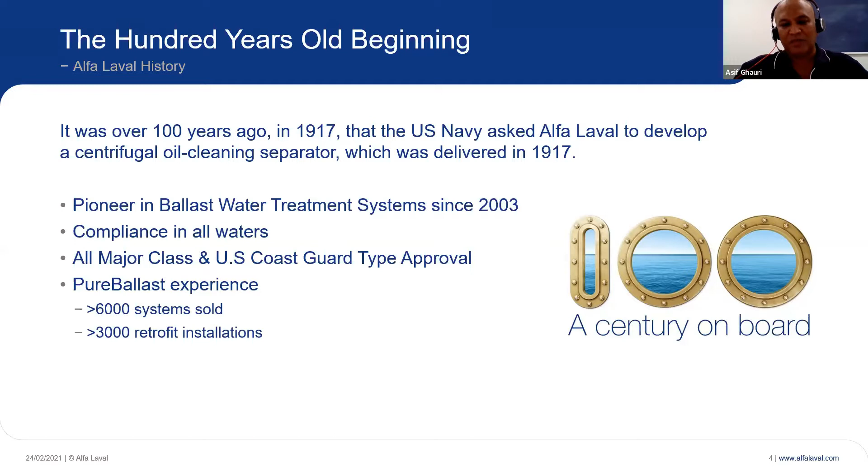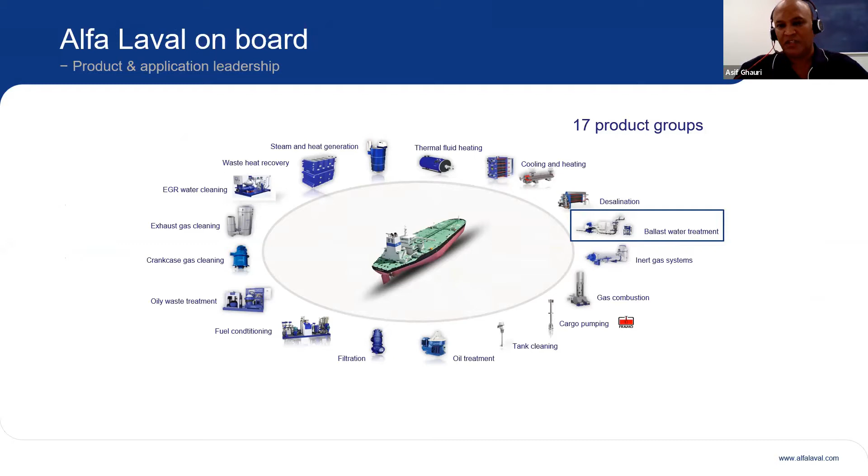The ballast water treatment legislation - as we all know, ballast operations are vital on board ships depending on loading, unloading, and different reasons for it. The UN recognizes the spread of aquatic invasive species as one of the four greatest threats to the world's oceans. That's why the Convention for Ballast Water came into force on 8th of September 2017.

Ship owners and operators are required to have a compliant and approved ballast water treatment system for their ongoing operation. 86 states have signed the treaty, representing 91% of the world GT percentage.

There are two different approving authorities: IMO, which covers the global market, and the USA, which has its own legislation where the requirements are a bit more strict. Because most of our fleet in Australia and nearby operates under the IMO umbrella, we will be talking more about the IMO Ballast Water Convention today.

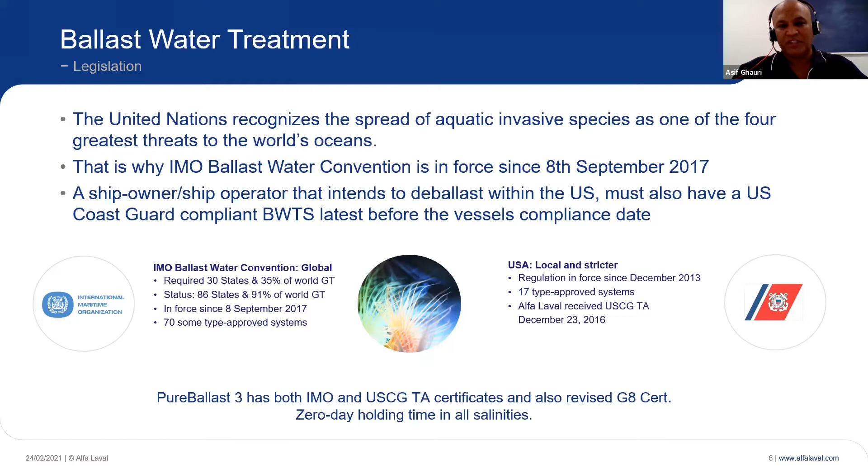As per the IMO rules, it has now been ratified by 91% of the world GT, gross tonnage, and by 86 states globally.

As per the rules now, new vessels must be equipped with ballast water systems at delivery, and existing vessels should install one system between 2019 and 2024. It's getting tied up, unless they have an exemption, with their docking dates as it happens.

The revised G8 is a testing mechanism used by IMO and US Coast Guards to approve different systems, and Alfa Laval was one of the first to get approval under the revised G8 regulations.

Of course, as we talk through this presentation, there are other requirements that customers and ship operators need to comply with as well. On the right side, I've included some information on the US Coast Guard regulations, but we will emphasize more on the IMO operations in this presentation.

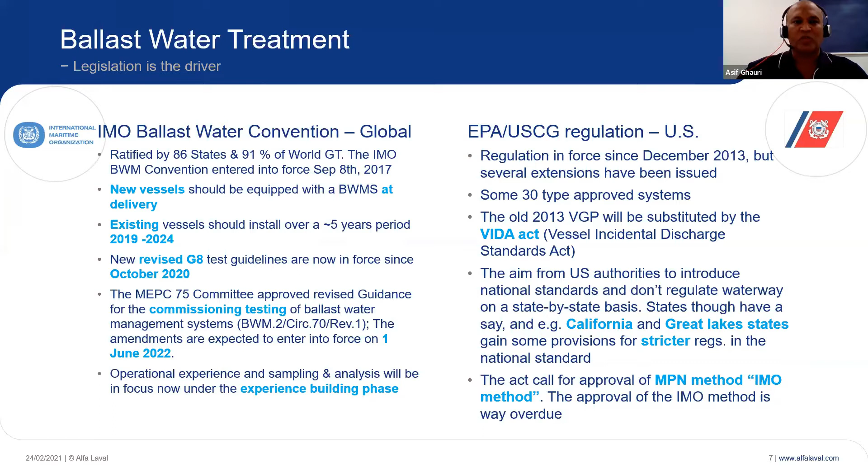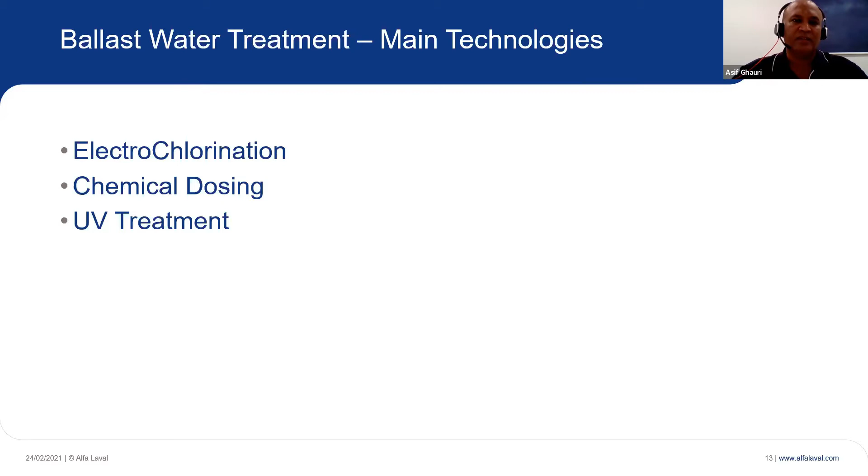Of course, there are different factors affecting the water characteristics that impact the ballast water treatment operation. The three main ones to consider are UV transmission, salinity, and temperature.

The main parameter of the UV system is the UV transmission. It's important to know the UVT values of the water being treated. UV transmitting levels in harbor usually range from 90 to 60%, but can sometimes fall to 50% or below. When UVT is low, more power is needed - high UVT equals clear water, low UVT equals poor water quality.

I will go through a bit more detail of how our system works and what is involved in that.

Salinity is a factor for chemical systems. Companies supplying chemical systems use high salinity water. Most ports could be exposed to river runoffs, meaning average salinity levels are generally lower. In order for these systems to run effectively in brackish or fresh water, they require the addition of salt or high salinity water, which must be stored on board in order to be effective.

Thankfully, our solution's systems are not dependent on water salinity.

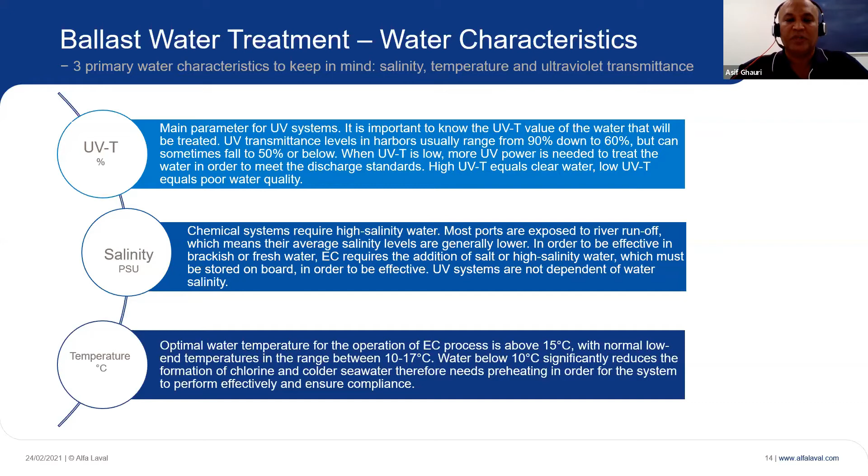Just a brief intro on the three systems that we talked about. Electrochlorination is the first one. The electrolysis of the seawater forms chlorine and hydrogen gas. The charge is introduced in the system, and the chlorine gas dissolved in the water produces sodium hypochlorite, which is used as a disinfectant.

There are some limitations to this system, such as that in fresh water, the power consumption is significantly increased. Also for these EC systems, as they're normally referred to, they will additionally require hydrogen traps, flame arresters, and other methods to safely handle the hydrogen which is formed in the process.

This allows for a one-way treatment, meaning during the ballasting operation, the seawater goes through the whole treatment, whereas when deballasting, it doesn't go through the treatment system. However, some kind of neutralization is required, which is an additional system you have to keep on board. In the case of the Alfa Laval UV system, the water gets treated during both ballasting and deballasting operations. Also, with EC systems, electrode cleaning is required, which is again an extra labor step for this system to work.

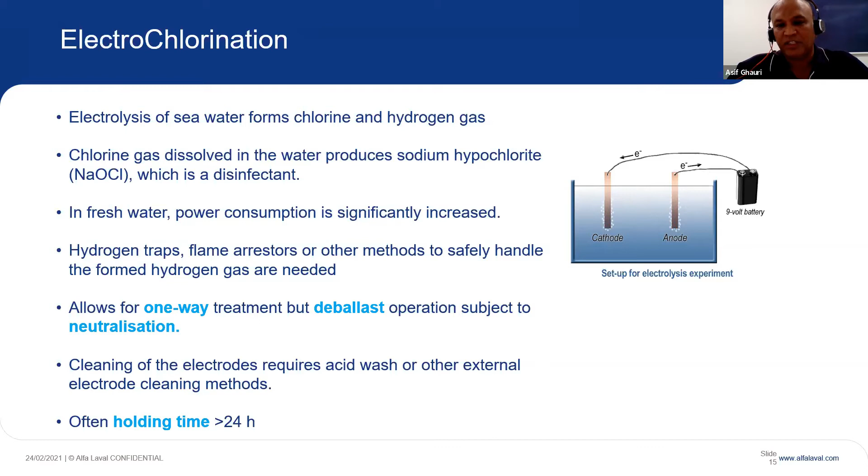The holding time is another critical thing to consider when selecting a ballast water treatment system. Different systems have different limitations. As far as the Alfa Laval system is concerned, we have zero-day hold time. We have only got 2.5 hours holding time before the water can be discharged, and that is only for the US system and systems operating in US waters. In Australia, we don't have any hold time requirements.

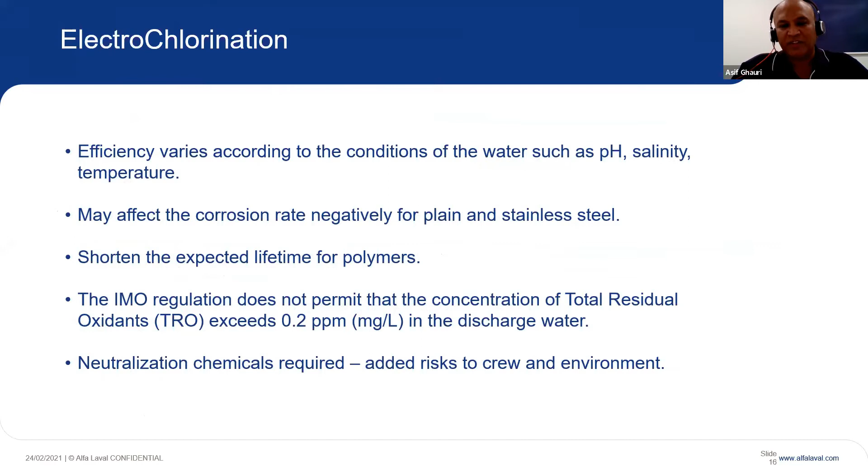The efficiency varies according to the condition of water, such as pH, salinity, and temperature, which may affect the corrosion rate negatively for plain and stainless steel. This shortens the expected lifetime of the polymers and chemicals you're using, and as stated earlier, neutralization chemicals are required, which is an added risk to crew and environment because of the chemical handling required on board.

Chemical dosing is another treatment system technology used for ballast water systems. The chemicals are made in a tank which is mixed with the ballast flow. The most common chemical used is chlorine dosing. Approximately 1 to 10 ppm of chlorine is dosed in with the ballast flow. The chlorine level is neutralized prior to discharge, and neutralization chemicals and monitoring are required, which is again another step that adds complexity to the system.

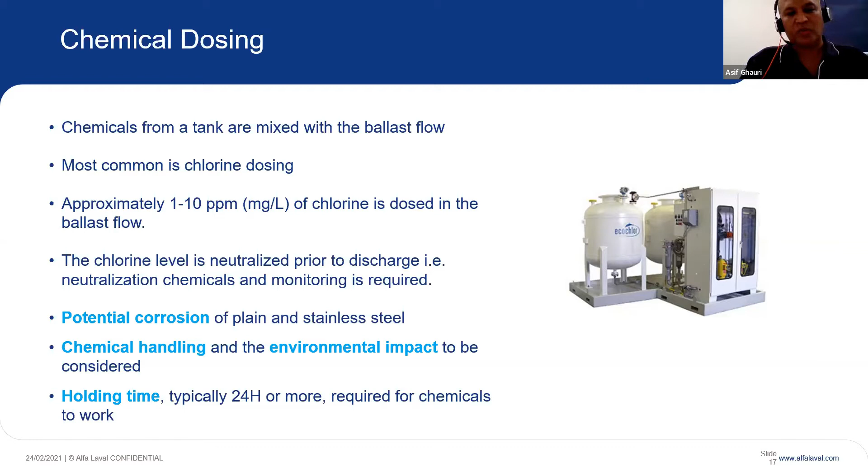Corrosion, of course, depends on the chemicals you're using, and if you're trading internationally, the quality of chemicals received at different ports can be different, so the risk of corrosion is very real in this case. Chemical handling and environmental impact must be considered as well. Again, a holding time of 24 hours or more is required for the chemicals to work.

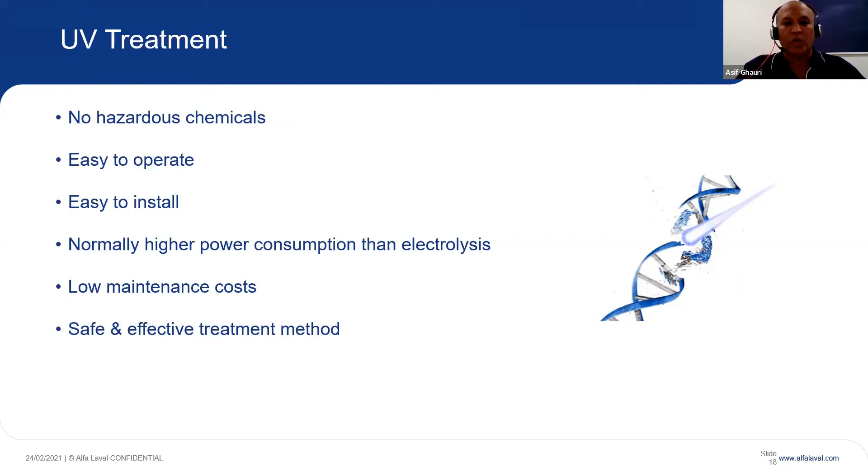The next one we are going to talk about is UV treatment. Of course we are not the only one providing this solution, but I will give reasons later on to say why we are the best in the business. The good thing about UV treatment systems is there are no hazardous chemicals required. They're easy to operate and install. The negative point can be a slightly higher power consumption than EC systems. However, our maintenance costs are low, and they are a safe and effective treatment method.

The Alfa Laval PureBallast systems are equipped with medium pressure UV lamps. There are medium and low pressure UV lamps, but in our solution we use medium pressure UV lamps with a very high output, typically 50 times higher output than low pressure lamps, making them very effective. As stated earlier, we have type approval from all the major class societies and also the US Coast Guard, and we are Revised G8 compliant systems.

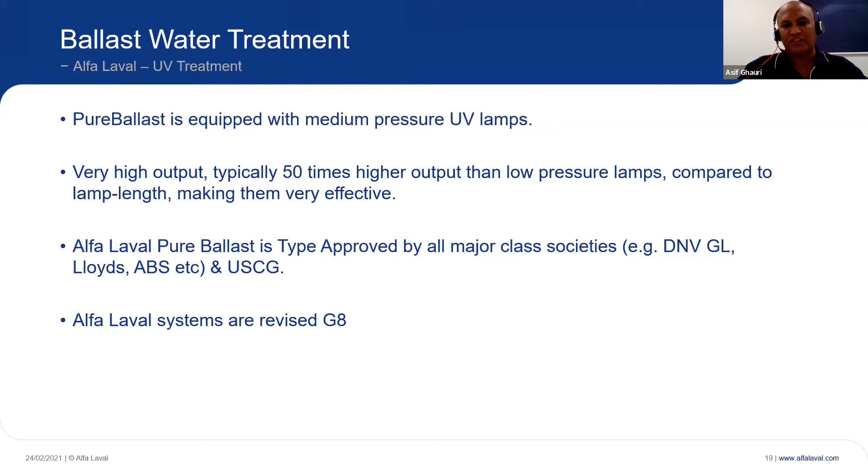They have the first generation Alfa Laval ballast water treatment systems installed, and hopefully these will be upgraded to the latest version within the next 12 to 14 months. That was very interesting, and from there, with our continuous research and development, we have achieved different milestones, including zero-day hold time, Revised G8 compliance, and approvals for operating in different environments and water conditions.

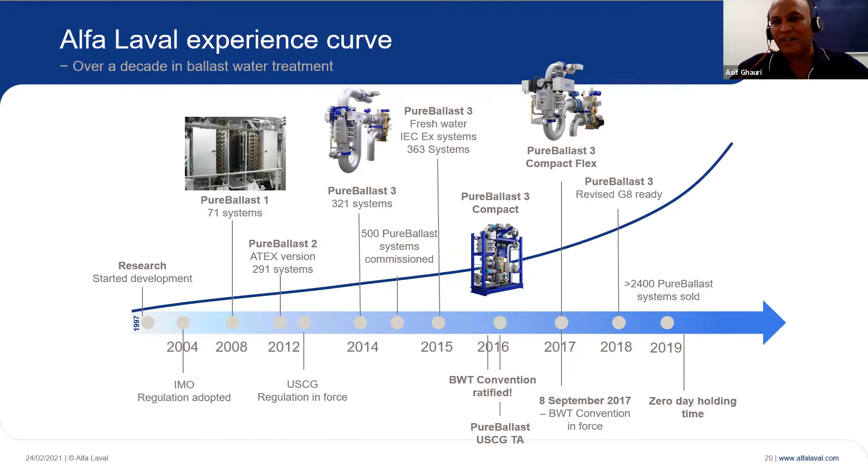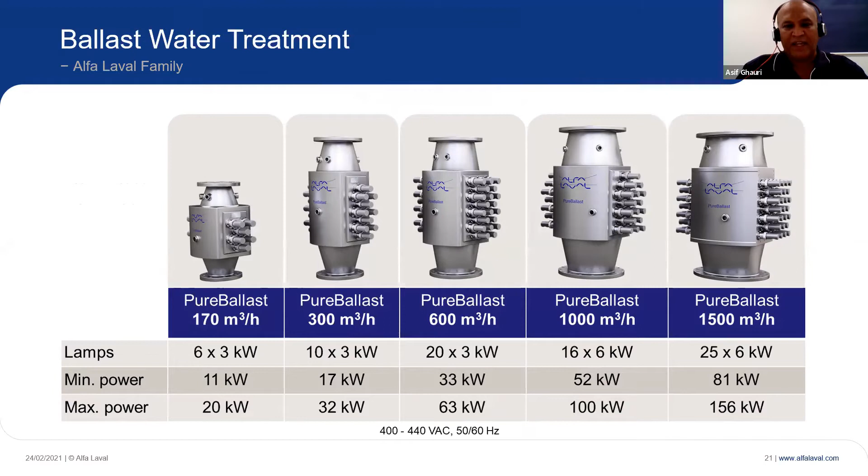Through our research and R&D over time, we have improved our design by introducing corrosion resistant SMO 254 for our reactors, which is a high alloy austenitic stainless steel. This is specifically developed for seawater applications, and it has a higher corrosion resistance than 316 stainless steel.

The Alfa Laval pure ballast systems are available in standard, compact flex, explosion proof, and deck house configuration. There are more slides to come, where I will briefly talk about what different systems look like. Okay, the next one. So these are the four.

Another recent addition to the family is a deck containerized solution for customer specific needs, because of space in the engine room and a few other factors, but that's not shown here.

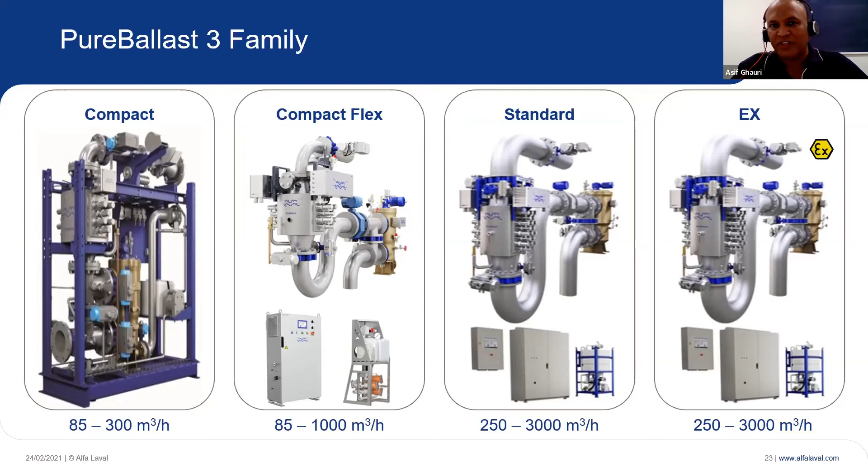Just going through the component, as you can see, this is our standard system. This is a very simple inline construction where the water enters the filter before it is treated in the UV reactor, and it goes to the nominated tank.

Most of the operation is automated. After every operation, our cleaning in place unit kicks in to clean the UV lamps, to ensure extended life and extended operational availability. And the filter, of course, is equipped with backflush.

Once it gets to a point after a certain operation, or depending on the DP, it will automatically backflush the system just to get rid of all the accumulated debris in the filter. So the whole system is automated, with minimal and simple operation and minimum human interruption.

Through our initial systems that were sold in different markets, one of the biggest challenges that we came across was how to install, as you can see, the normal system. Because customers have different requirements, especially if you're retrofitting in a small engine room, space is a huge challenge for us when installing our system.

One of the really big improvements that Alfa Laval came up with was two systems: compact and compact flex. The one on your screen showing on a skid is an Alfa Laval compact system, where the whole system is on a skid. It is basically a plug and play system, and it is very easy to install and connect to the existing setup.

Of course, there will be some piping required to be done after the system to the existing ballast water system on board. But as you can see, the actual installation of the ballast water treatment system is rather very simple and easy. This system is available from 85 to 1,000 cubic meter capacity.

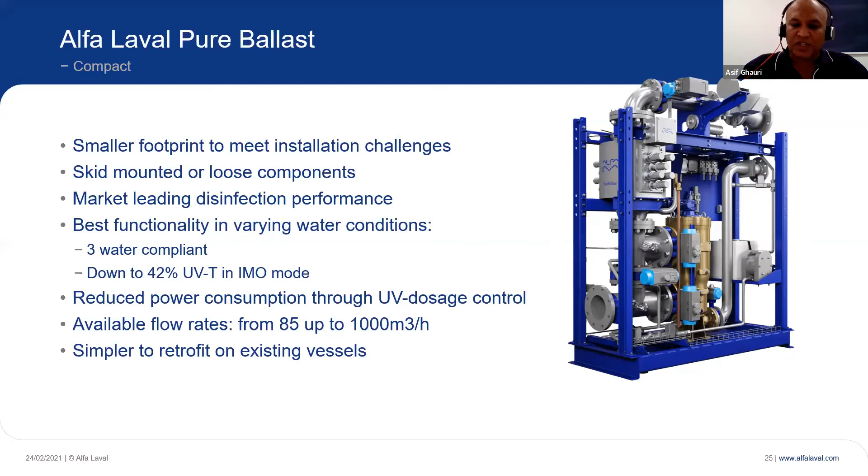I must say, this is a very good product for us to sell. It's very, very easy to convince the customer, and they can see the benefit of this, because the installation costs for these systems are a lot cheaper than the other systems, which I'm going to show you on the next slide. As you can see, the same system is supplied in different components.

We call it a compact flex solution. This system originally came from our purifier modules, where, of course, when space is an issue, we supply the components, the system in component form, and the customer can then install them at different locations within the allowable proximity and get the units connected.

However, in the compact flex solution, as you can see, because of the installation requirements, the installation costs are higher than the compact. So of course, for us the better option, the preferred option, and for the customer as well to give them savings, we try to sell the compact systems. But where that's not a viable solution, the compact flex is another alternative and a very effective one.

The ballast water treatment system, depending on ship size and operational requirements - power is one big thing to consider. As per our R&D and what we have seen in most normal operations, our power requirement is only 50% of the rated capacity for our system. Since the system is automated, as water quality deteriorates, it adjusts UV transmittance automatically, meaning required power consumption can go up as well. But for most systems under normal operational conditions, the required power is only 50% of the rated capacity.

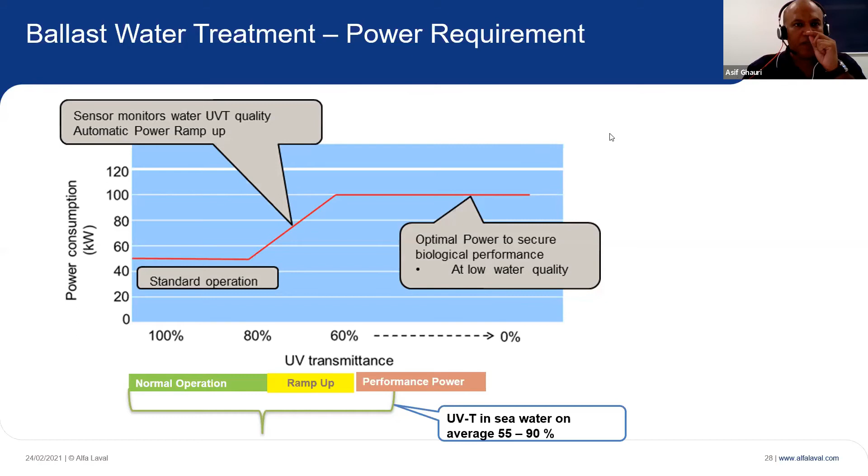Now just a few quick slides on the process, the actual process of the retrofit. In Australia, most of our customers are coming to us for existing ships. It's a small market, so most of our projects have so far been retrofit projects.

In Alfa Laval, we have a global pool of engineering partners - companies who we train on how these systems are to be installed and what to look for. They become our engineering partners, who we can refer our customers to for 3D scanning, installation assessment, and engineering reviews.

In addition to that, we provide ongoing assistance through our excellence centers in China and Europe, where our colleagues are on a daily basis involved only in answering different questions from our customers regarding installation, design requirements, or any other question they may have from time to time for their selected system.

We also, from Australia, when we sell the system, provide installation checks. Before commissioning, we do pre-installation checks - I've done a few myself, where we visit the ship to check for available space, then talk to the customer about their requirements. Once the system is installed, after they've consulted with the engineering company who's done the review and the 3D drawing, we know where the system will be installed, and then we do an installation check before commissioning as well.

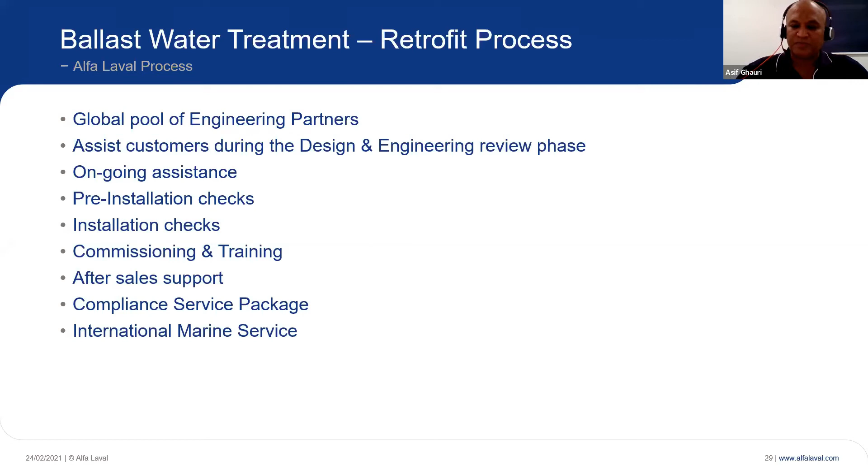Just the retrofit experience, we have sold 6,000 systems worldwide so far. More than 3,000 have been retrofit projects. As you can imagine, the ship size and customer needs and requirements are very different, and every sale we make is a new project with its own challenges.

And that is one of the biggest differentiators for Alfa Laval: our local presence and understanding of the local market and customer needs. The other suppliers in our market either operate through their Singapore or overseas offices, or through a local engineering company. Whereas in our case, when you're dealing with us, you're talking to Alfa Laval, getting services from Alfa Laval, not from a third party who may or may not be trained. We are constantly developing and working on our systems.

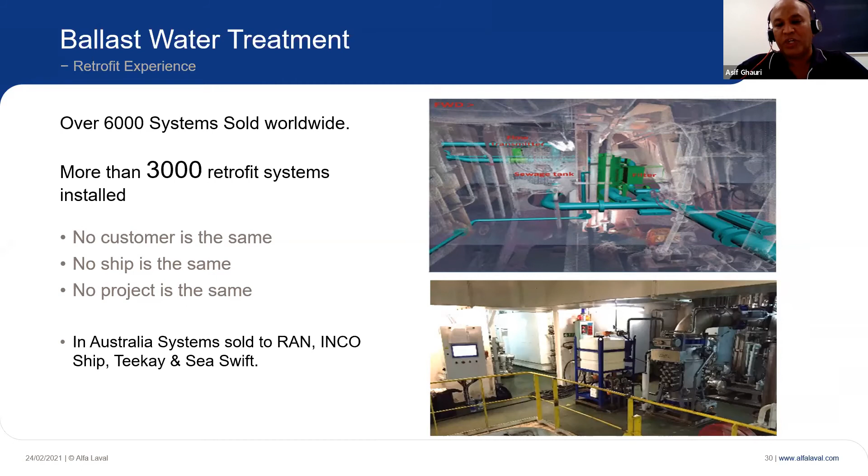Over the systems that we have sold, as I mentioned before, no two systems are the same. What we have learned over the last 18 months or so is that it is very important that the customer is willing to invest the time right in the beginning of the project, to ensure you have the available space, and have discussions with the Alfa Laval approved engineering partner to do the required surveys of the system and 3D scanning of the area, just to ensure the right system is selected and everything needed for the system to work is available.

The later it is done, I mean these are things we'll need to do at some point anyway, but the later it is done, it will simply add to cost and delays of the project. So that is why this is one thing we have learned.

The work is really important, and installation supervision is crucial for successful installation, commissioning and training. As I stated, it is always good that you're talking to the OEM rather than the sales company or sales agent of a supplier who is not present in Australia. Especially in these COVID times, the need to have local resources and the ability to respond to customer needs was never more important than what we have seen during this pandemic.

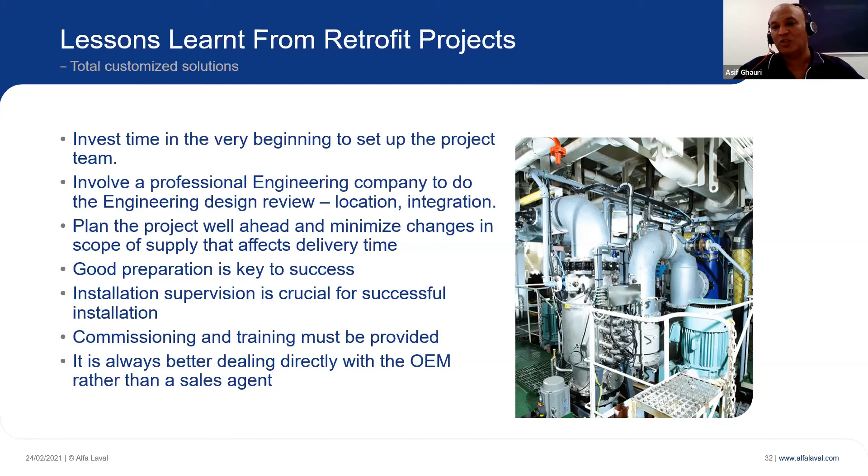Again, during this COVID-19 pandemic, remote assistance and remote working with different customers have become really important tools. I'm sure you would have seen the same tools implemented or promoted by different companies as well. So this is something we are offering with our systems too.

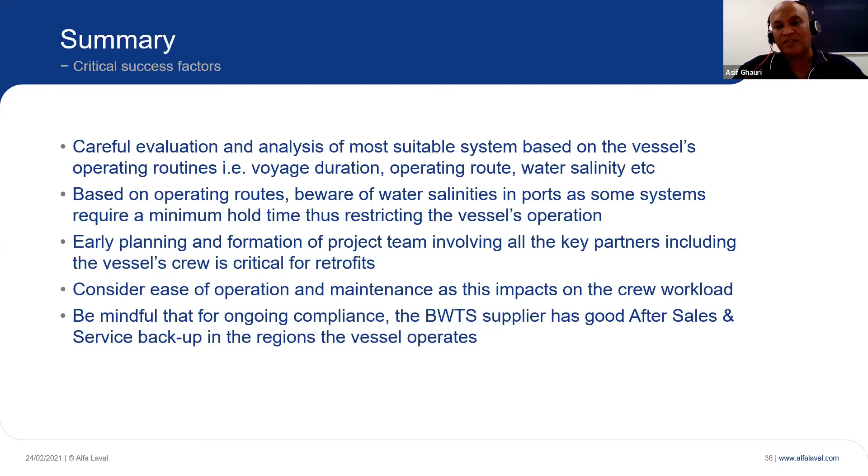Early planning and formation of a project team involving all key partners, including the vessel's crew, is critical for retrofits. Consider ease of operation and maintenance as this impacts crew workload, and be mindful that for ongoing compliance, the ballast water treatment supplier's system has good after-sales and service backup in the region the vessel is operating in.

And with that, I am open to any questions you may have, please.

Phil Helmore here, Asif, if you can hear me. The question that I have is, whereabouts is the UV treatment applied? Is it applied in a tank, or is it applied to the incoming ballast water as it flows in? It is applied through the incoming ballast water as it flows in.

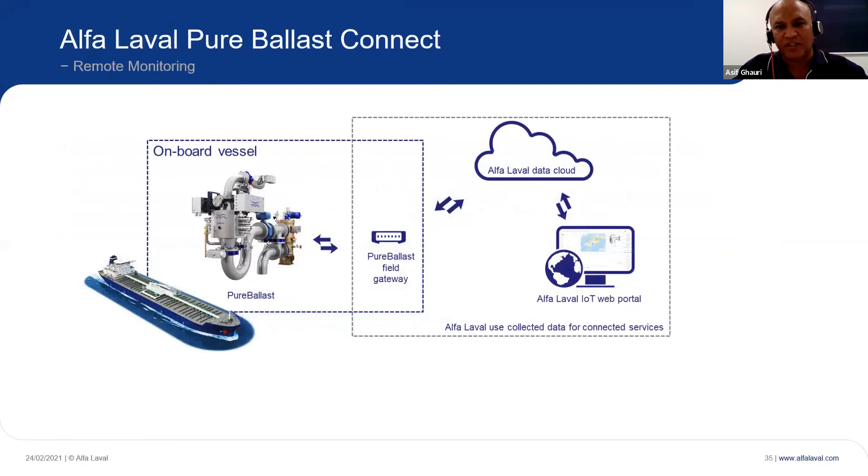Right, okay, that's the question, thank you. Yes, and the same applies when we are deballasting - the only difference is the filter is bypassed in the deballast operation. Does it go through the lamps again on the way out? Yes.

In our solution, the water gets treated going into the tanks and coming out, just to ensure compliance, and to reduce last risk in the operation.

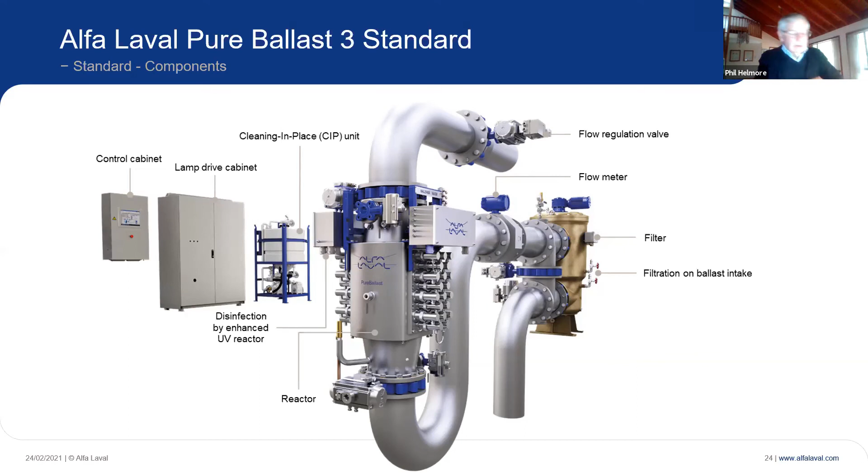Thanks. Geoffrey here, I have a question concerning the materials used. You said it's a high alloy austenitic steel that gives better corrosion resistance than 316L. Do you know what the designation is, is it 321? For the reactor, we are using SMO 254, which is highly corrosion resistant. In some of our earlier models this was not used, but over time through our R&D, we are now using SMO 254 for our solution.

Steve Morant here. Hi, can you hear me? You indicated annual compliance certification is required. Is that an internal requirement, an IMO required classification, through class societies, flag state, or just an internal Alfa Laval requirement? No, it's an IMO requirement for the system to be in compliance, and the annual service compliance has to be done by the OEM.

And for your case, we will be providing the service through Alfa Laval Australia. Do you do that in front of class or flag state, or do you just send us certification? No, we will do the service and issue you the certificate, which is kept on board, and if you are asked by class, you can show that certificate that the system is in compliance.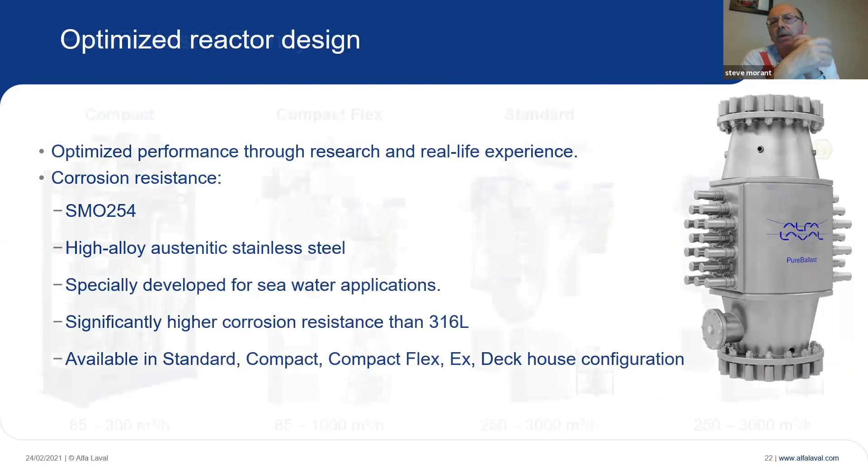I'll have one other question, since nobody else has jumped in. You've indicated that the skids can be split down, and I know from experience that skids will be split down and installed in various areas. Is there a maximum distance between pump, filter, UV unit, and reactor, or can they be really remote from each other?

I think the limitations are given in the design guide, installation and design guide for various systems, and we ask our customers and engineering partners to refer to the design guide supplied with each system. But this is mostly for when space at one location is critical or not available, and that's why this solution works. Of course, at the time of system or ship evaluation, the distances will be considered as well.

I'm assuming your remote monitoring offer can be retrofitted to any installed equipment already there. What sort of additional cost would you be looking at, and is there an annual cost to maintain remote monitoring?

There are some costs available for monitoring, very nominal, not too expensive. I'll have to check the systems. I think they are only a few hundred euros per month per system, if my memory serves me right. But for your actual system, which is going to be installed on Jules, I can get more information and submit cost proposals to you. Okay, thank you. No problem.

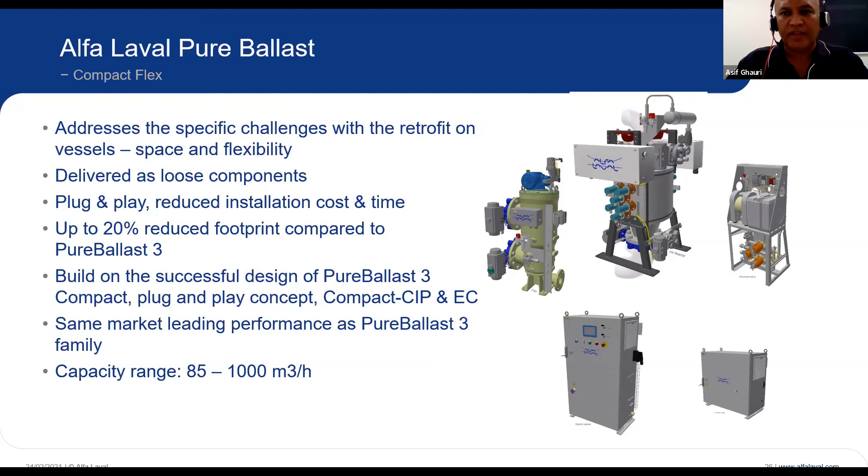Jeffrey here again. Can I ask you about the lifespan, or expected life, of a UV lamp? I think it's 3,000 operational running hours. The running hours for the UV lamps.

I'm thinking you wouldn't be replacing just one lamp. I wondered if there was a system in place for replacing them all at a set time span. The running hours for UV lamps is 3,000 hours, and we have the CIP system to clean the UV lamps after each operation as well. At 3,000 hours we will recommend replacement, or in other cases, if one is broken for whatever reason, it may be required to replace only that one lamp. If only one is broken, we will only replace one, not all of them.